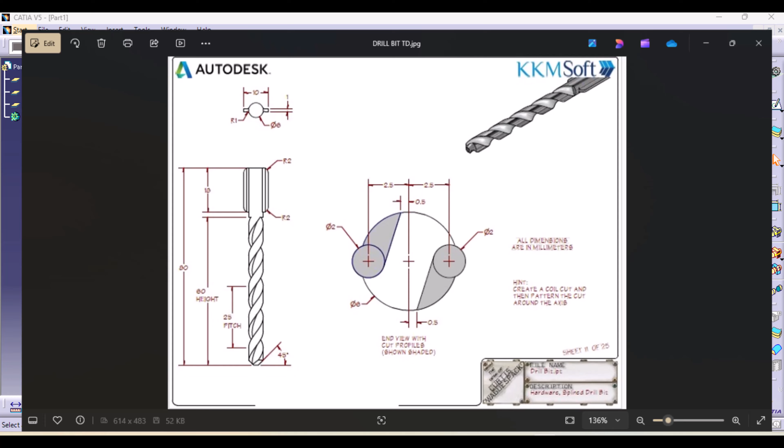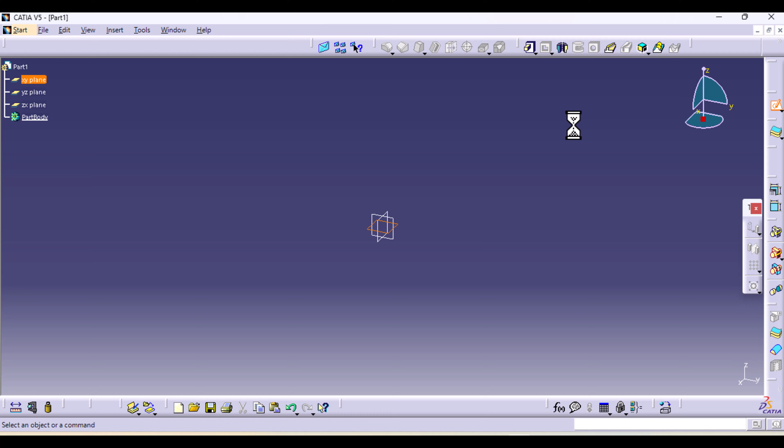So we're going to start by creating this shaft. As you can see from this top profile, this is 6 millimeters in diameter, and it is also 80 millimeters in length. So we can select the XY plane and sketch. Then you're going to create a circular profile. And the diameter, now this is the radius. So if the diameter is 6, the radius is going to be 3.

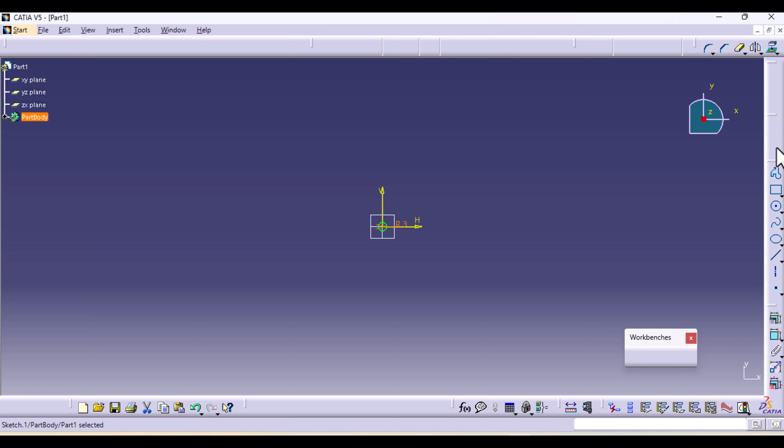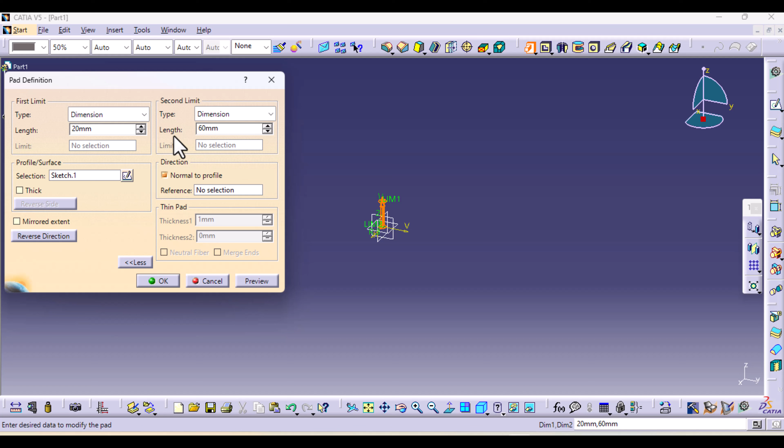Then we're going to create a pad, which is going to be 80 millimeters, but I'm just going to extrude 20 on the upper side and 60 on the lower side. So I'm going to enter a second limit of 60 millimeters, like that, and select OK. All right.

Then we're going to create the profile, this profile here. So its length is 10 millimeters, and the width is 1 millimeter. Then we have an edge fillet of 2 millimeters on both the top and the bottom profile. And it also has another fillet where it attaches to the shaft of 1 millimeter radius.

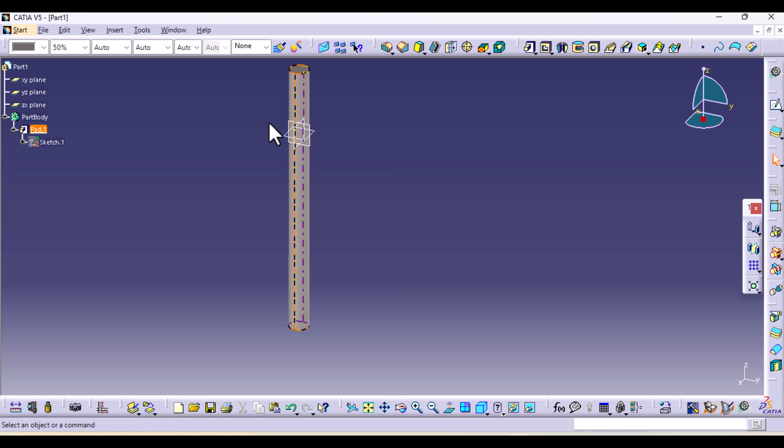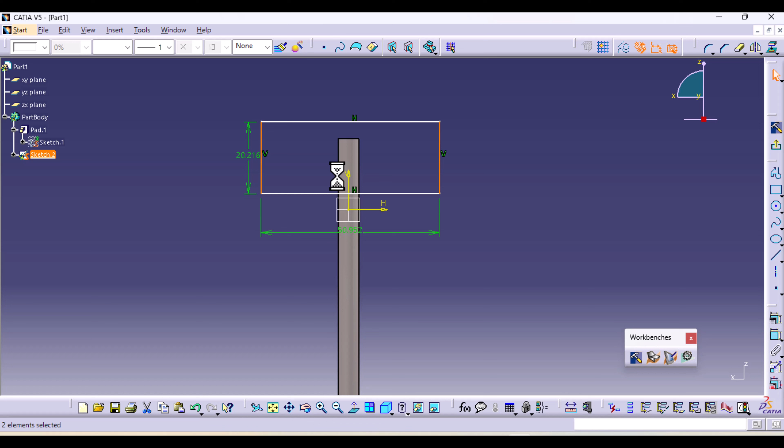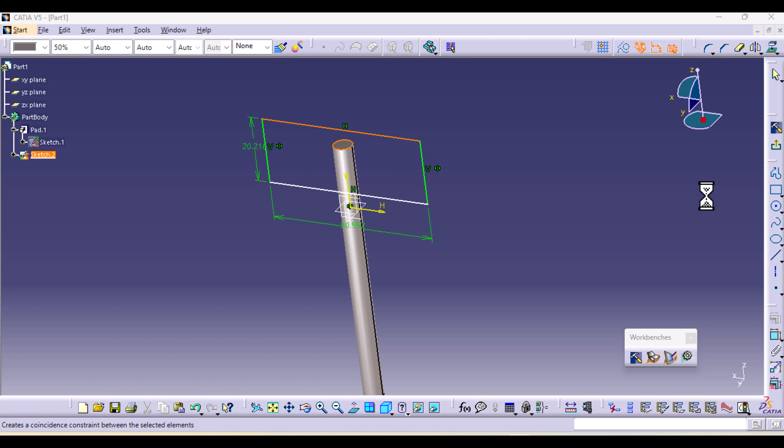So I'm going to select the ZX plane. We can just use a rectangle like that. Then select both of these heights and make them symmetrical about the vertical axis. Select symmetry. Then for the top part, it should be coincident with this surface. So coincidence.

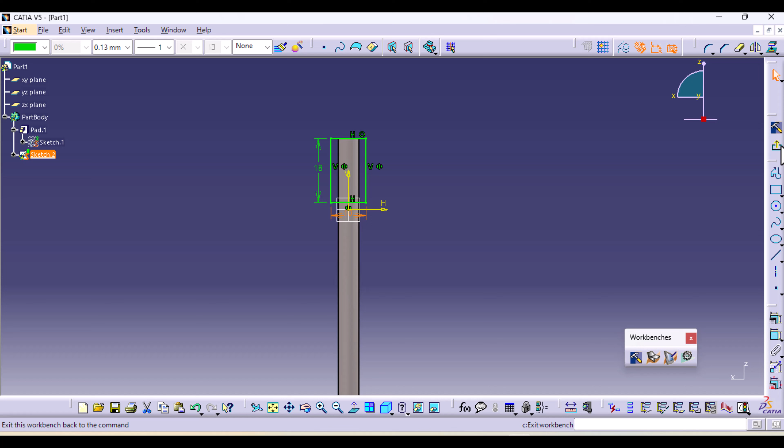Then we can adjust the measurement. So this was 18 millimeters. And this is supposed to be 10. So 10, 5 on each side. I think that's good. Now this is in the middle. So when we are extruding, we're going to use mirrored extent and divide the length. So the length was 1 millimeter, so it's going to be 0.5 in each direction.

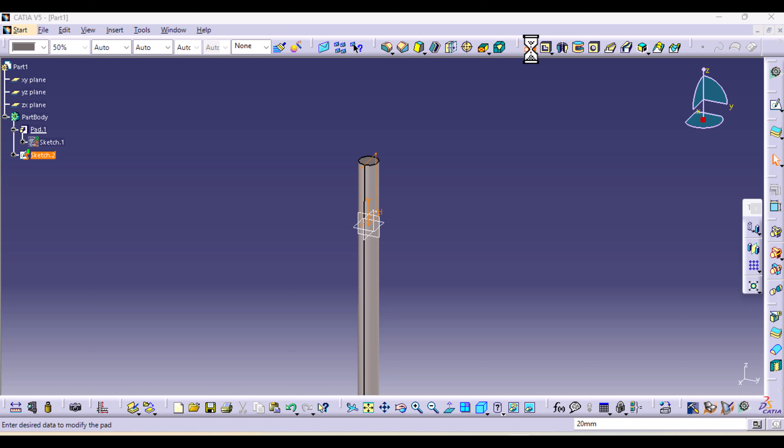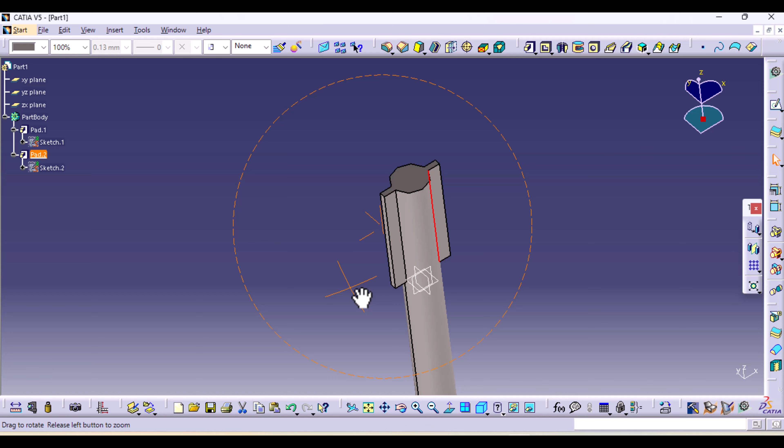So you can just select a pad with mirrored extent, and then the length is 0.5. Then we can apply the fillets. So for these 4 corners, the radius is 1. So select edge fillet and then enter the radius. That is 1, sorry. It's 1.

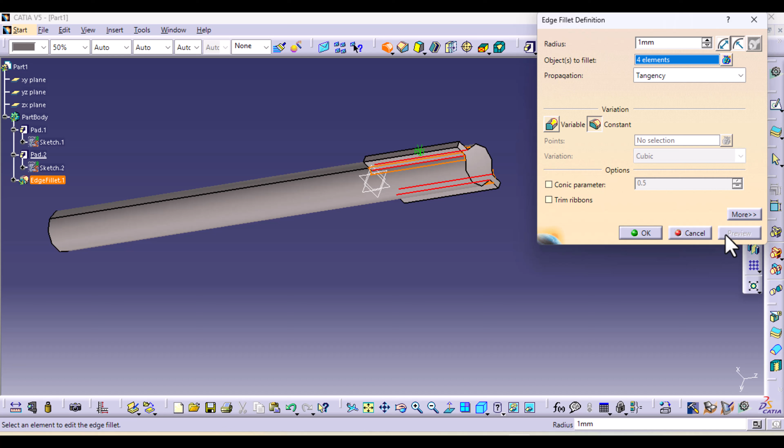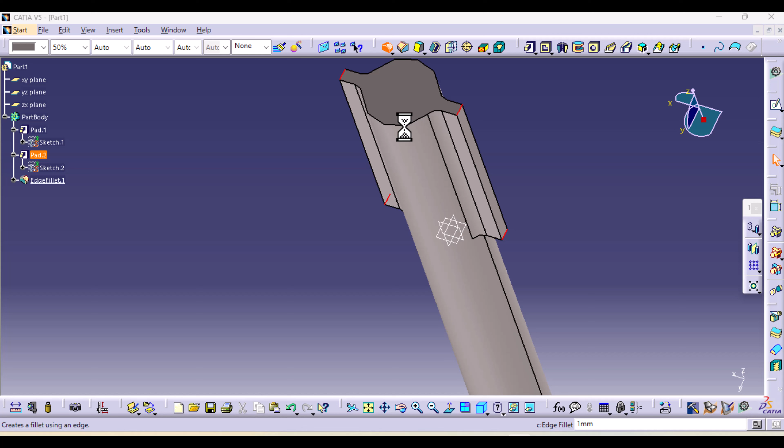And then for the top and bottom corners, that's where we have 2 as the radius. Once again, the edge fillet, and then this is 2 millimeters. So we are done with the top part.

Now for a length of 60 millimeters from the bottom, that's where we have the winding, spiraling drill bit part, or the slot. So we're going to create the profile. You need the profile and the center curve. So the profile is the one that is going to cut out the material, and then the center curve is what that profile is going to be spun or wound upon.

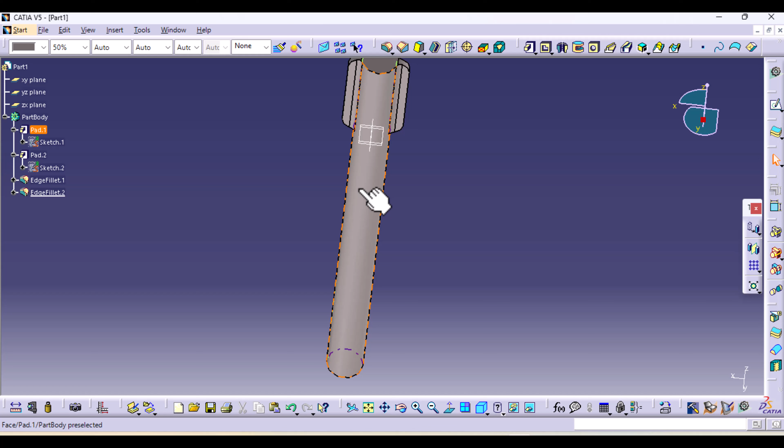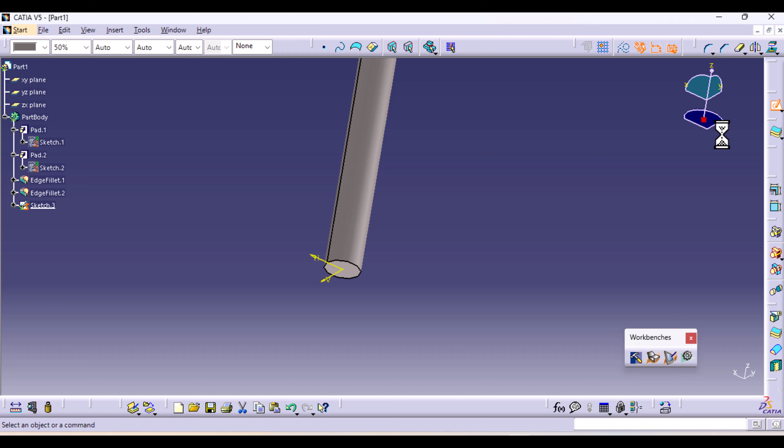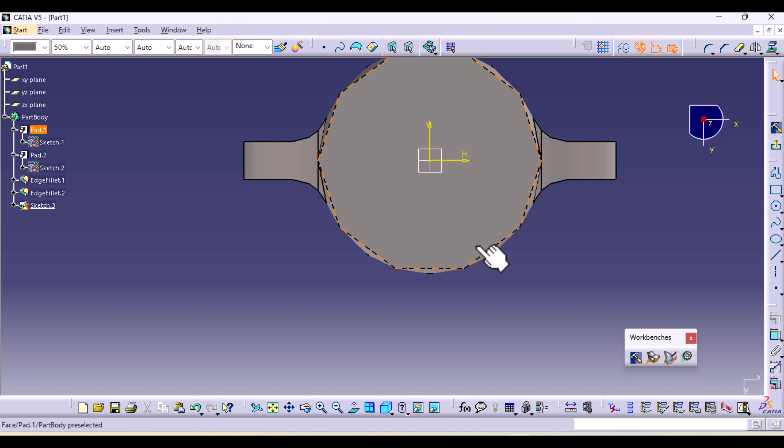I can select this and project it as a construction element like that. And then you create the circle. But now this one is a standard element. Its radius. So the diameter is 2. That means the radius is 1 millimeter. And it's a distance of 2.5 millimeters from the center.

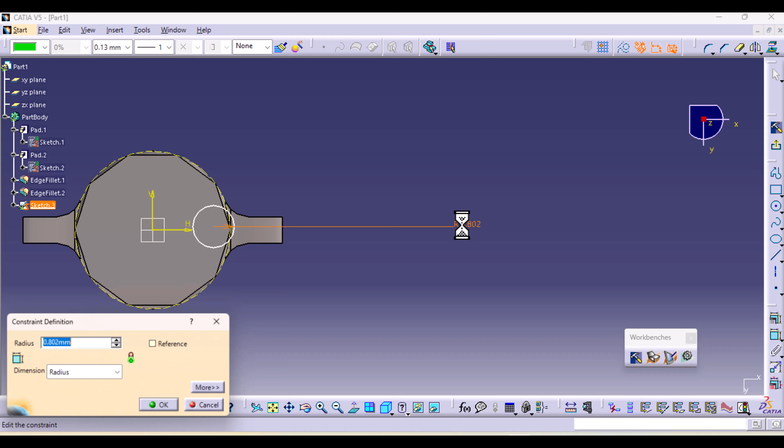So the radius is 1. And then the distance, you're going to enter a constraint from the middle to the center. And this is 2.5.

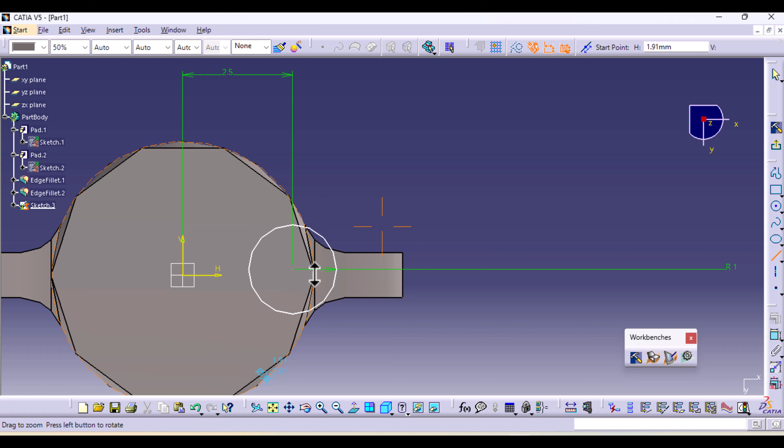Then we've got this tangent line running from the circle to a distance of 0.5 from the vertical axis. You can just select a line. If you zoom in, you can see the automatic constraint definition. So you can see if you start here, as you move it along, it's going to create that tangency.

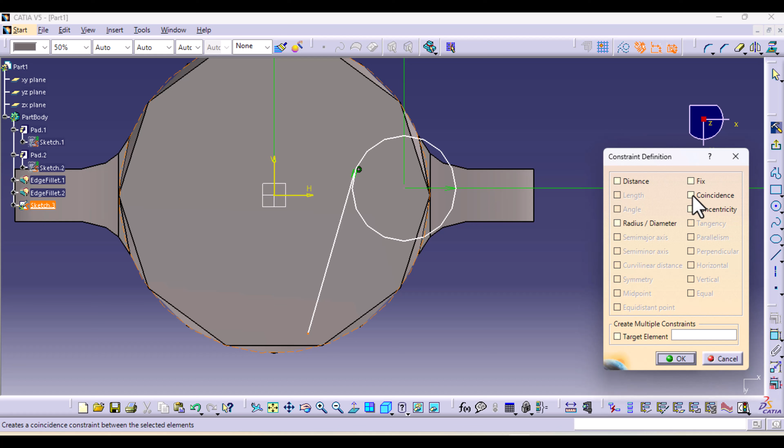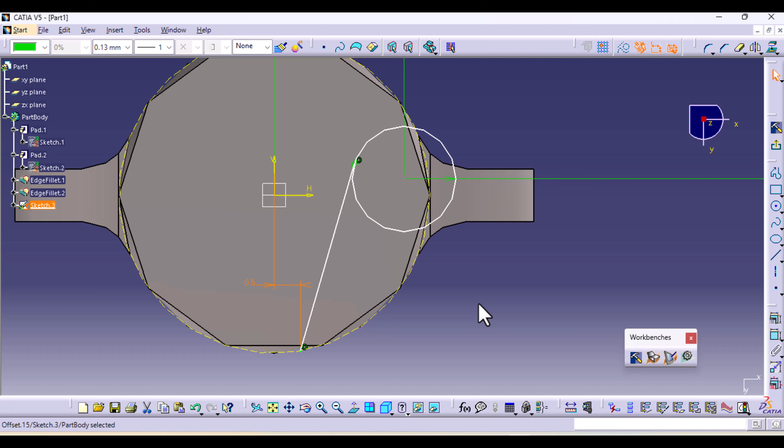So I'm going to bring it up to that part, and then I'm going to make this point and this circle coincident. Then I'm going to add the 0.5 measurement from the vertical axis. Like so. But now remember, we cannot perform our functions using an open profile like this one.

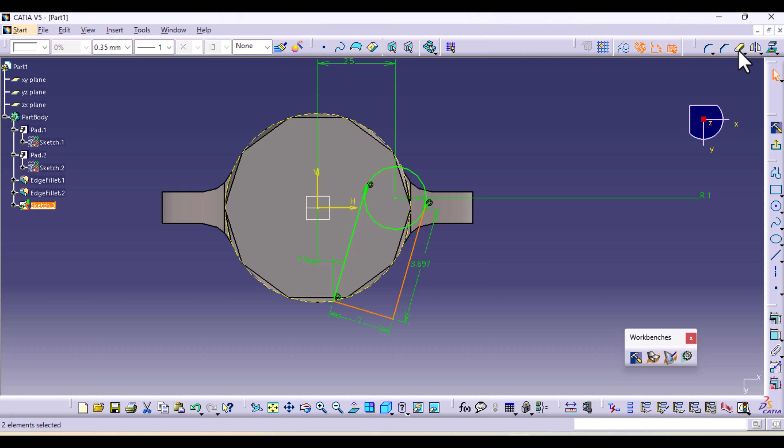So you can just make another profile of your choosing to just close it up. So perhaps I can just complete it like that. And then you're going to select quick trim, this one off, this one as well, like so. But the important part is this part right here. So that will be the one that we're going to cut for this side.

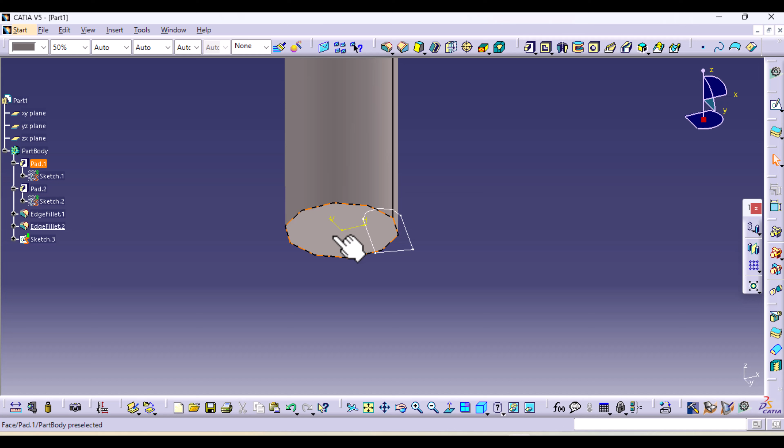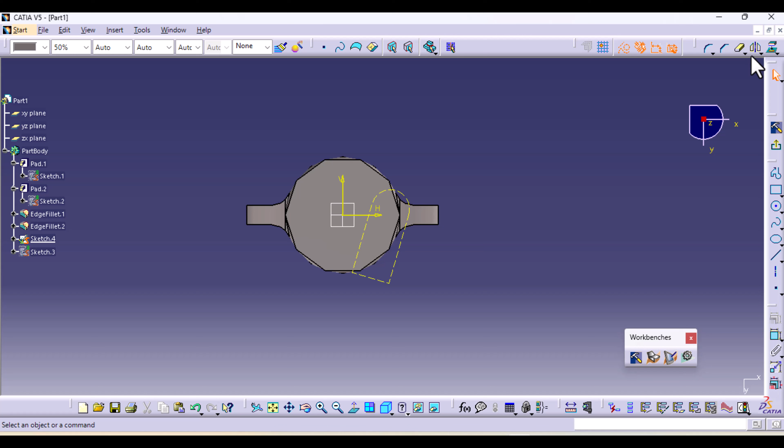So we can make the other sketch by just mirroring this one. So once again, sketch this plane. And then select sketch 3. We're going to project it as a construction element. You can hide sketch 3 and then you're going to mirror. Let's select it first. You're going to select this.

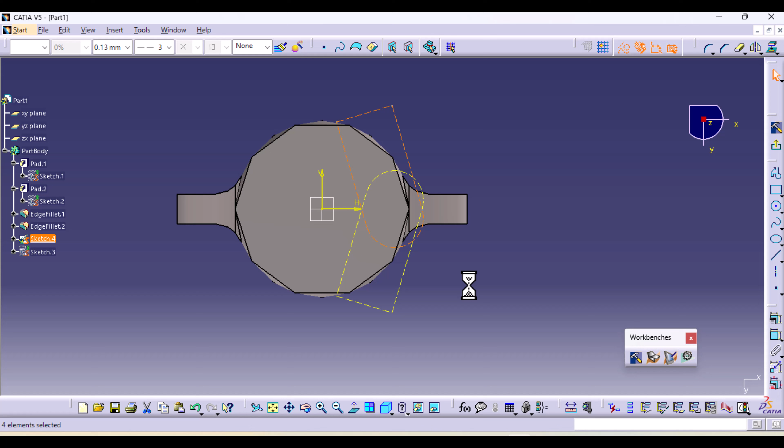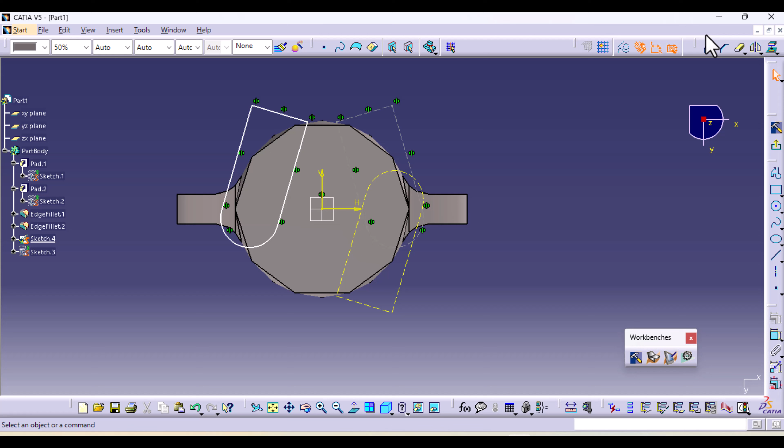You mirror it using the axis. And then select the new profile and then mirror it using the vertical axis. So now the final one is going to be a standard element like that. This one that faces upwards. Okay. So we've got the profiles.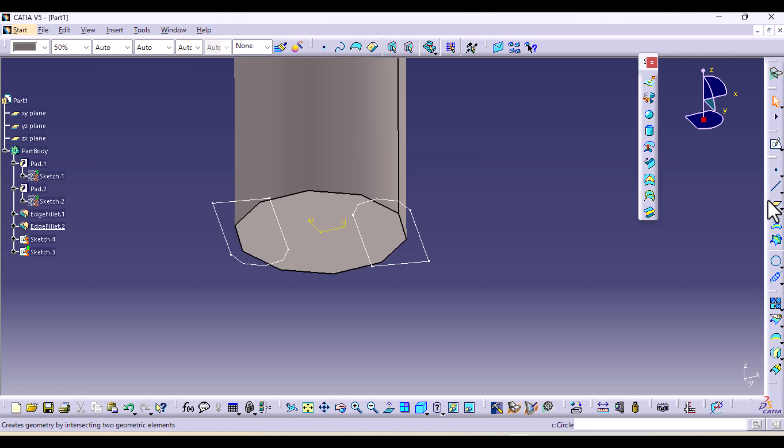Now we need the helix, the center curves. So you can go to mechanical design. There is wireframe and surface design workbench. And from here, you're going to be able to locate the helix. If you don't have the tabs here, you can go to insert, wireframe, helix. All right.

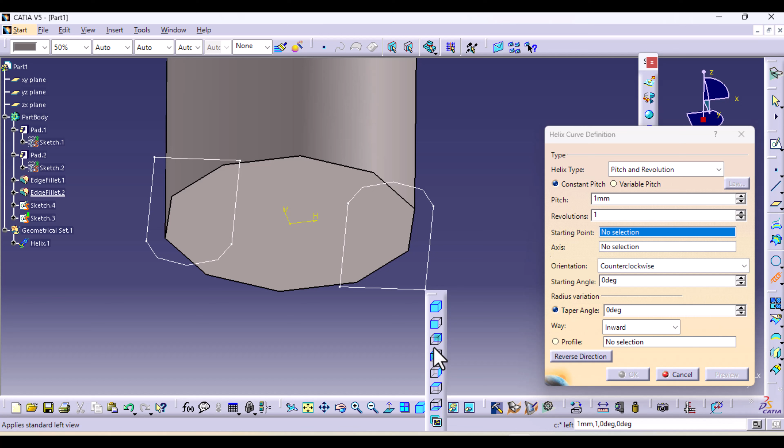Now I don't know if I should create the points first because we need starting points. We need starting points on each extremum. That's the top side. I needed the bottom side. So one is going to be from this side, another one is going to be on this side. But either way, we can just put it roughly because when we're going to be performing our functions, we're going to move this profile to the center curve or the center path.

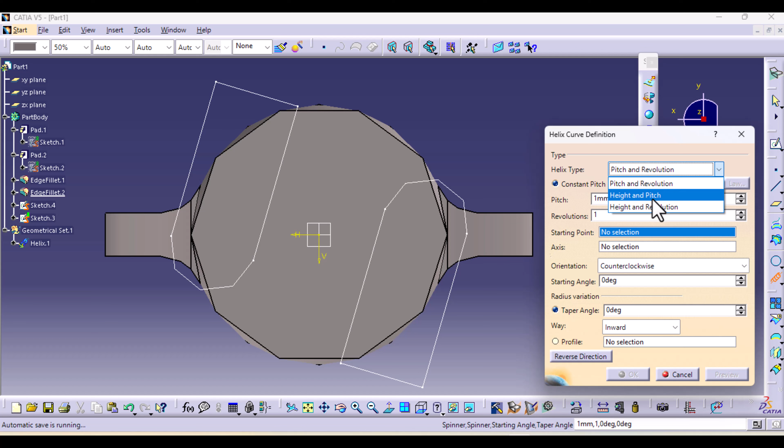We're using height and pitch because that's what we've been given here. We've got a pitch of 25 millimeters and a height of 60 millimeters. Just feed in the values. That's 25, the height is 60. Now the starting point,

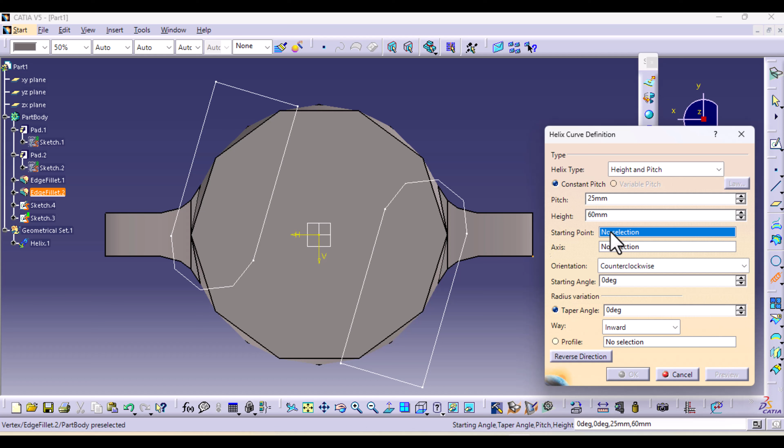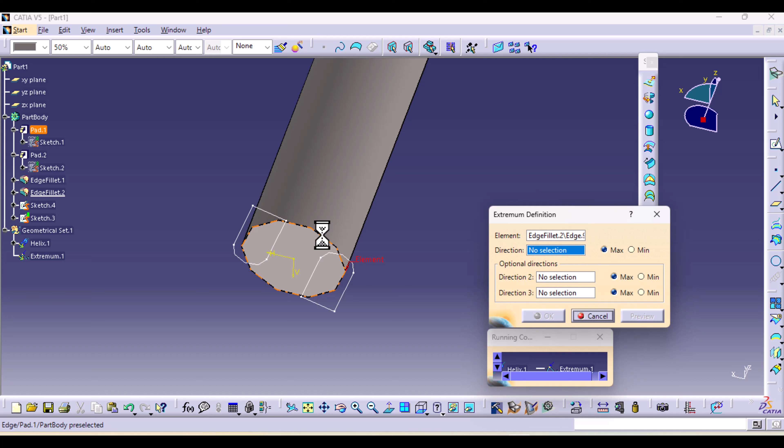you can right click and say create a point or create an extremum. Then this is going to be your profile. And then the direction is going to be X component. Say the minimum side. Select OK.

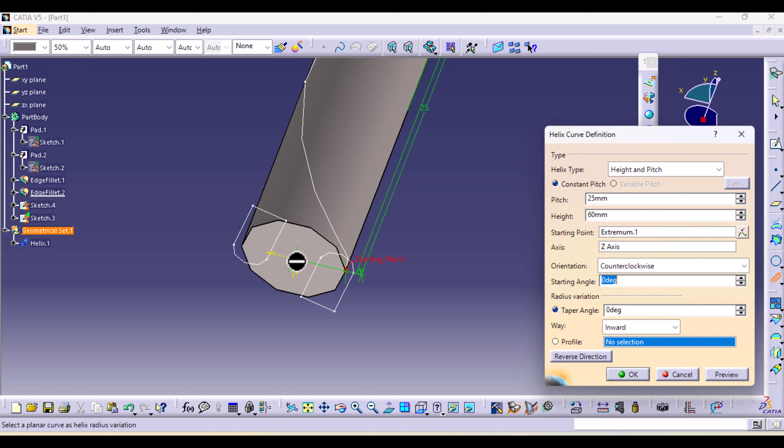The axis is going to be the Z axis because this was right in the middle. If it wasn't in the middle, you would have selected the axis of this particular profile. So in this case, I'm going to select the Z axis. So now the radius of this helix is going to be from the axis you selected to this point, which is the same as the radius of our profile.

So if you select, say, front, you can see that the radius is the same as that of the shaft. So that is important to note. If you wanted it to follow a particular path, like let's say you wanted this helix not to go on a straight profile, but rather a bent profile, you would make that curve and then you would select it here as a profile. So you click on profile and select it here.

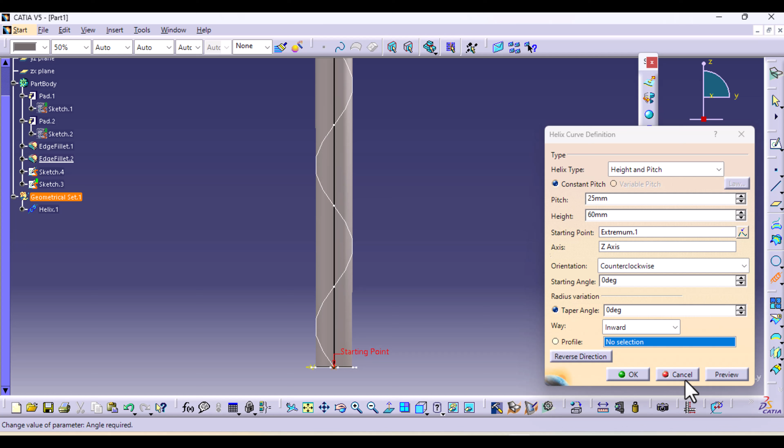But on this occasion, it's the Z axis. So then we're going to select OK. So you can see the distance is up to 60. Then we have a 2mm gap, and then we have 18, adding up to 80mm of the height. We create another helix on the other side as well.

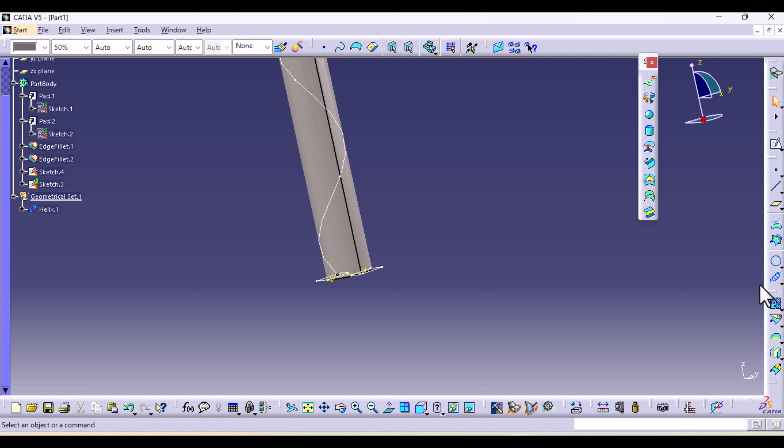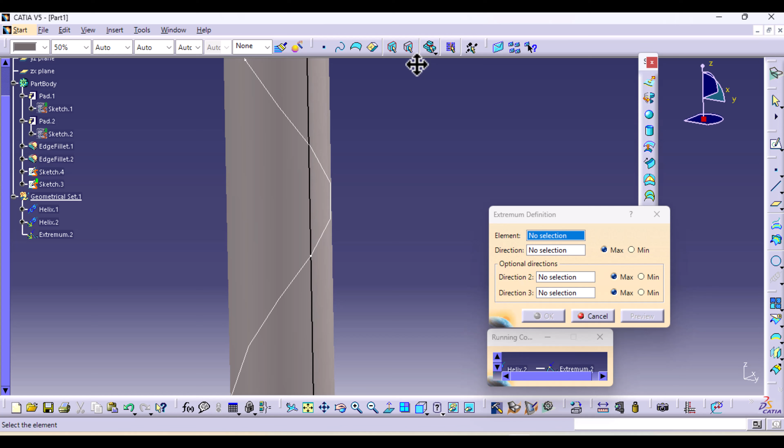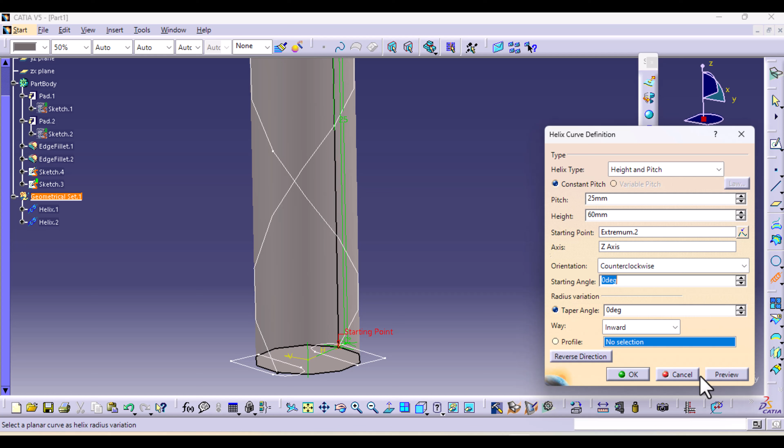The values are the same. This is pitch and height. So 25, and then we've got 60. And then the starting point, you're going to create an extremum. Once again, select this bottom circle as your profile. On this X component, the maximum direction. Then the axis is once again the Z axis, and select OK. So we've got both the profiles and the center curves.

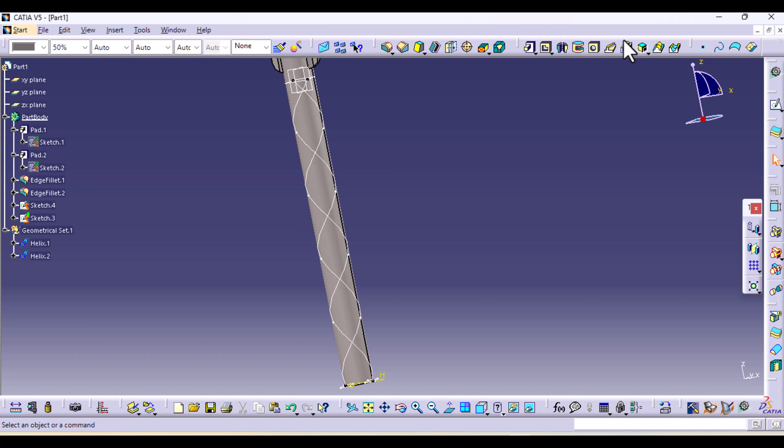Let's go back to Part Design Workbench and define this part body as the current work object. And now we can create the slots. It's as simple as that. So now when it comes to creating the slot, you've got the profile and the center curve. I've already explained. So you can select sketch 3, and then the center curve is going to be the helix that starts there.

Now the difference here, we've got profile control. Profile control determines how this profile is going to be wound up your center curve. So in most cases, keep angle is usually the default, and that is because when we are creating slots or ribs, we create them along a planar profile, like a straight line. So keep angle keeps a constant angle between your profile and your center curve.

But if you select the drop down menu here, you will see that we have pulling direction, and we also have reference surface. So for pulling direction, if you select a line or an axis, your profile here is going to remain parallel to that axis that you have selected, or a plane or a line.

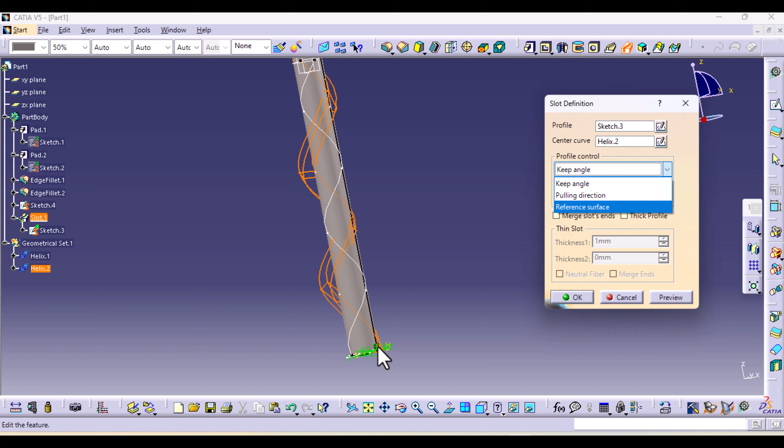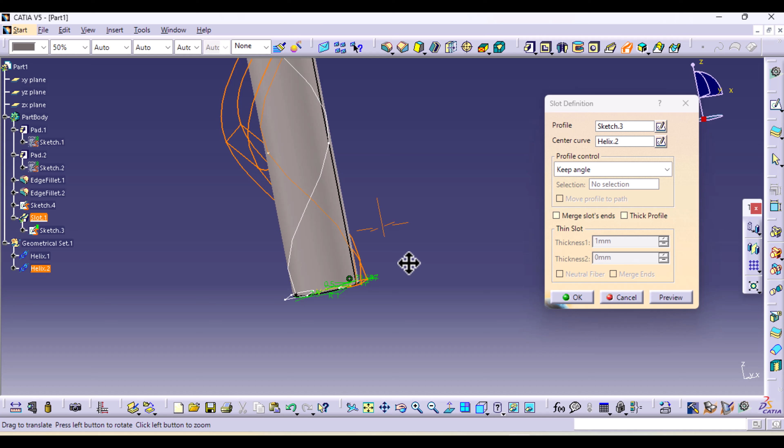And for reference surface, it's going to keep a constant angle with the H direction of your profile. When you're creating the profile, it has a vertical and a horizontal axis. So between the horizontal one, the H axis, and the axis of this profile, it's going to keep a constant angle. Now, to understand the differences, for example, in this case, if we use keep angle and say preview,

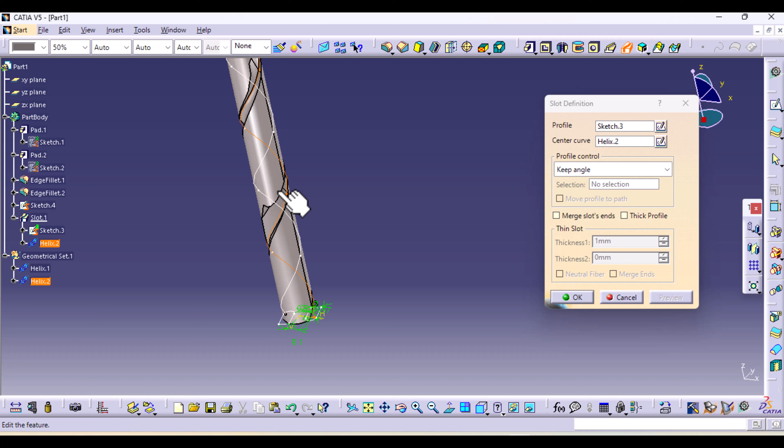you're going to notice that we are not getting a very regular profile. You see? And that is because our profile was not a uniform circle. It had some straight lines and some curved parts. So when we keep a constant angle between this and the center curve while it's winding, it just cuts at different positions. But if we switch to pulling direction, and select the axis here at the middle, which is the Z axis, and say preview, you see it becomes uniform.

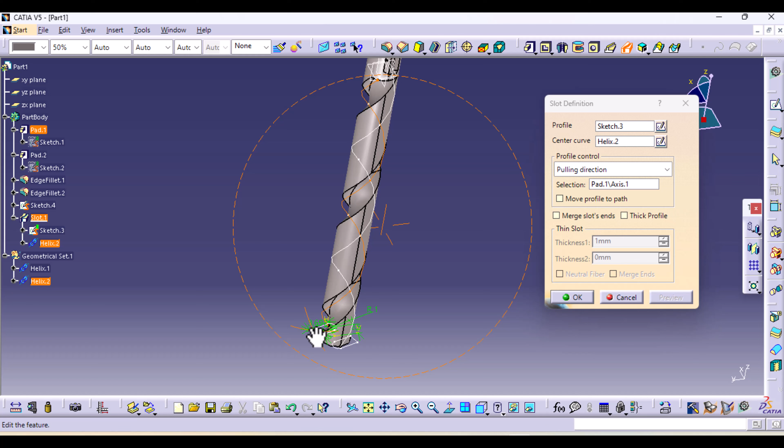Now we've got a uniform cut, and that is because it has kept this profile parallel to that axis that I just selected. So at every given moment, the profile that is cutting is the same at all instances. And also, in this case, the pulling direction and the reference surface is going to be the same. Why? Because the axis is the same.

If we select reference surface, it's going to select the same axis that we selected when we were saying pulling direction. So if you say reference surface, you're going to select this one. And again, if you preview, it's going to remain uniform. So I hope I have explained that

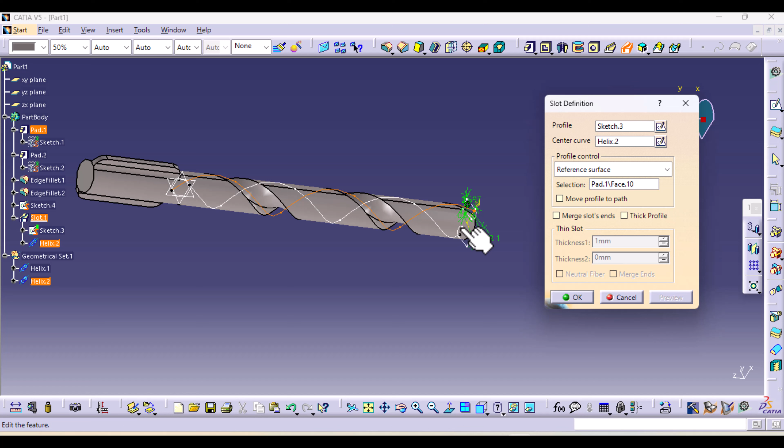as well as possible, because there's also this option to move profile to path, and that is where we created this profile is not the same as the starting point of your helix. So if you select move profile to path and say preview, you can see now our positioning has been adjusted. Our position, it has pulled it out up to that point, which is at the very edge.

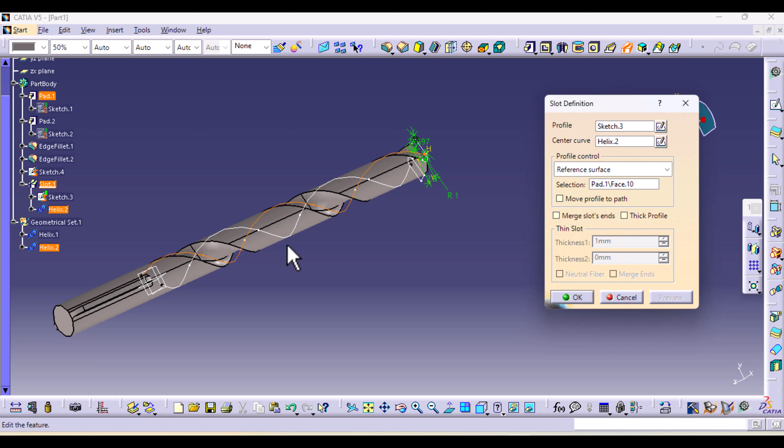So of course, we're not going to use this one in this case, but there are instances where you create a profile somewhere else and you want it to be just pulled to that point where the center curve is beginning. There is also another option here, which is merge slot ends. So for merging, you're going to have to check where your profile ends. So it ends here, and you can see it's just a sharp cut.

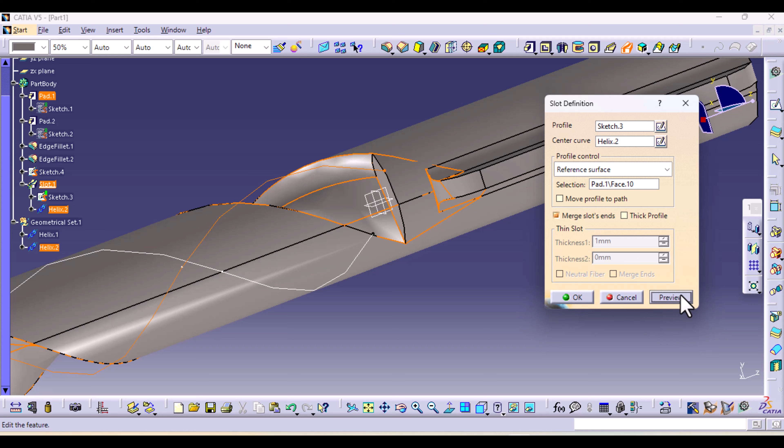So I've specified 60 millimeters. So once the 60 millimeter option was done, that is exactly where it cuts off. So when you select merge slot ends, it's going to extrude this profile to try and merge it with this surface, the top surface. You see, it's going to try and smooth it out.

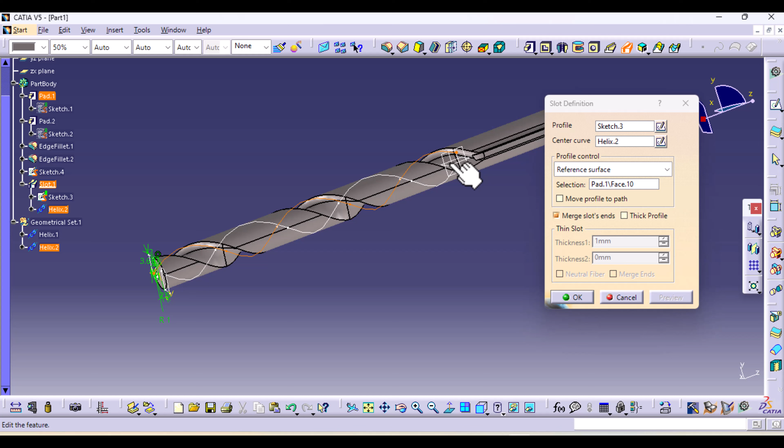So mostly when people are creating bolts and such kinds, they select this option for the bottom profile, so that when you're winding, you are not greeted with a sharp cut. So it starts off smoothly and then it winds up. But in this case, there was not that option, so we're going to leave it out. Thick profile or thin slots are the same as when we use pads or other features that are selected here.

So instead of creating a block, it selects a thick profile along this profile, or a gap, and then you specify the thickness here. So in this case, we're not going to deal with that. I just wanted to teach you how to select the profile, the center curve, and how to use profile control.

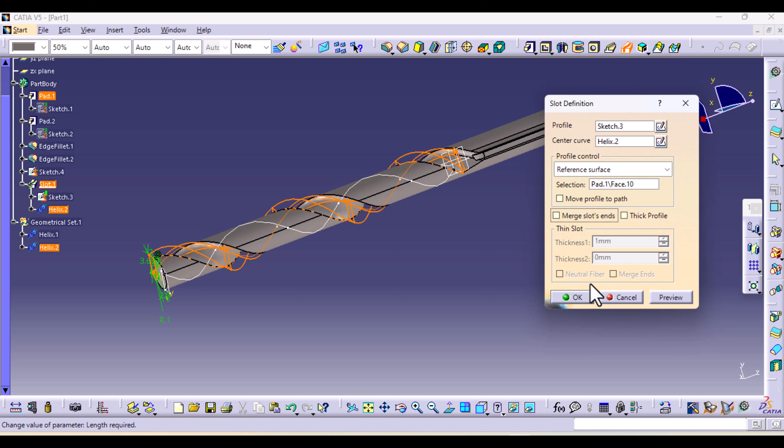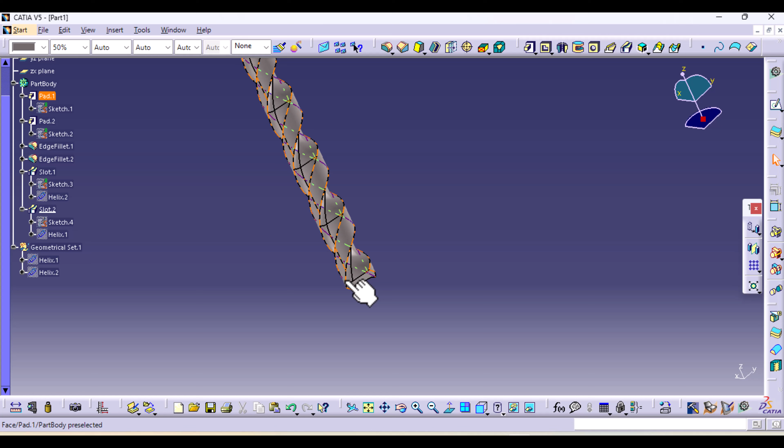So we're going to select OK, and we're going to repeat the same thing for this one. We're going to use reference surface, and then I'm going to select this as our surface, preview, and select OK. So now that's much better. Then at the bottom here, we've got a chamfer, but unless we created it before we cut out, we cannot use chamfer. We're going to use a groove.

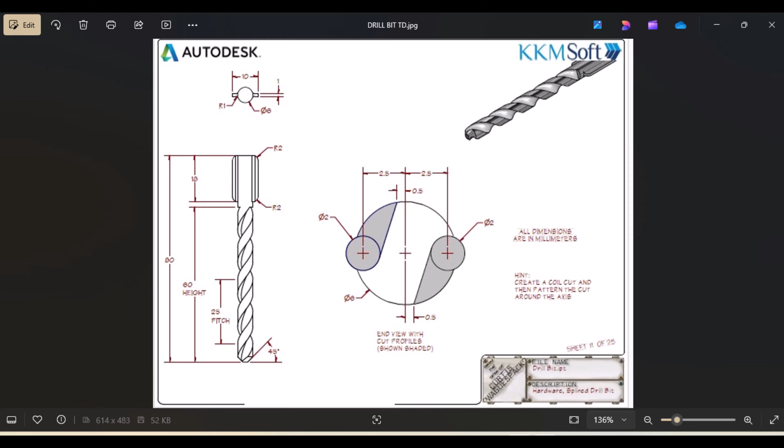So we've got a 45-degree chamfer. So in this case, I'm just going to create a profile and then select groove, and it's going to cut out our material so that we get a sharp end that is going to drill. You can select the ZX plane and sketch. So select profile and just create a standard profile like a rectangle.

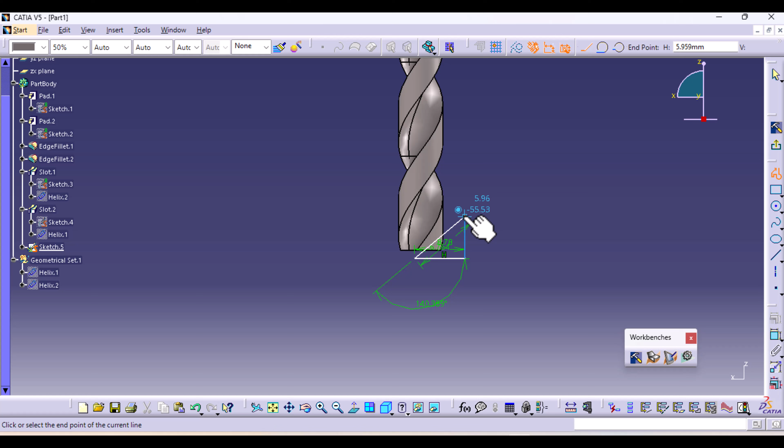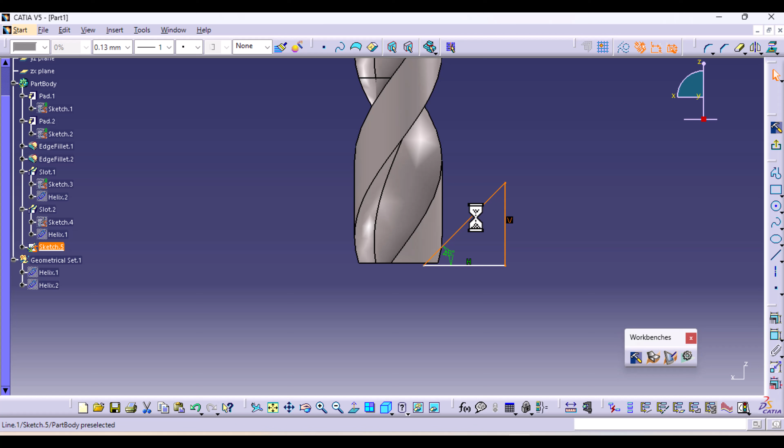Okay. Then we've got the horizontal axis, so I don't need this to merge with the horizontal axis. Just going to do away with this measurement and just add this angle right here to be 45 degrees. And I can just move it like so.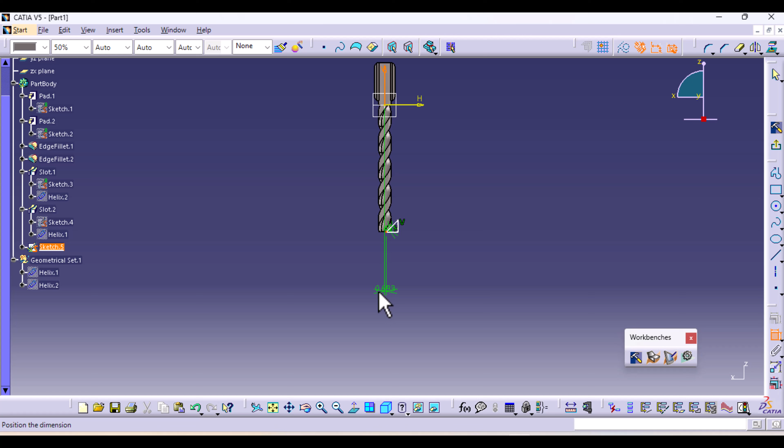So I need this point to not surpass the center because I don't want to reduce the length. So I'm going to add, just to make sure there's a distance there that is being left out, maybe 0.5. This was not specified, but you can leave out a distance of 0.5 from the middle, and then from here create a 45-degree chamfer. Now exit,

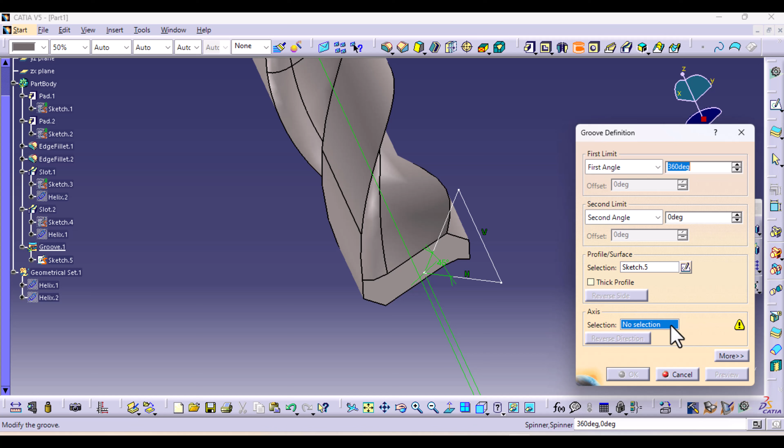and then you're going to select groove around the z-axis. Axis is the z-axis, the profile is sketch 5. All right, so that's the tip of the drill bit, and that's all there is to slots.

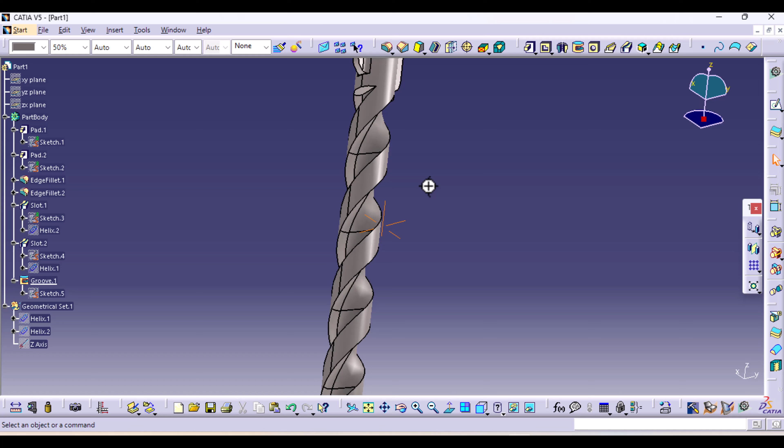You can add a steel material. So that's how it looks. I've selected to show edges and points. You can choose to select material only, and you've got your drill bit.